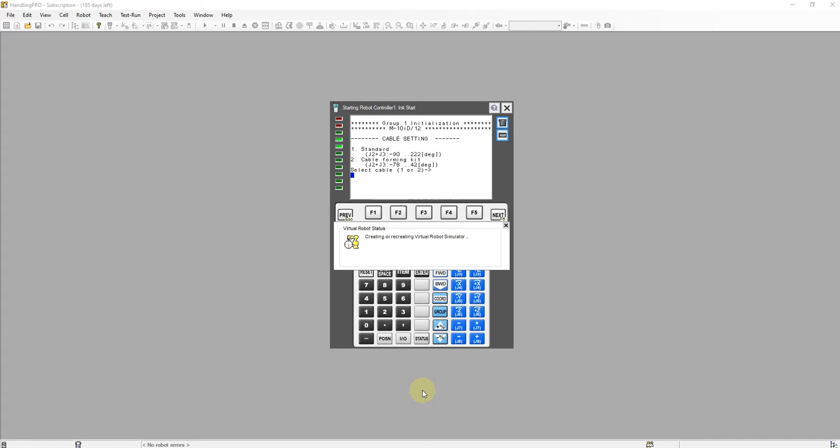Now click the next button until the finish button turns clickable and then click the finish button. Wait for Roboguide to process your selection until the robot shows.

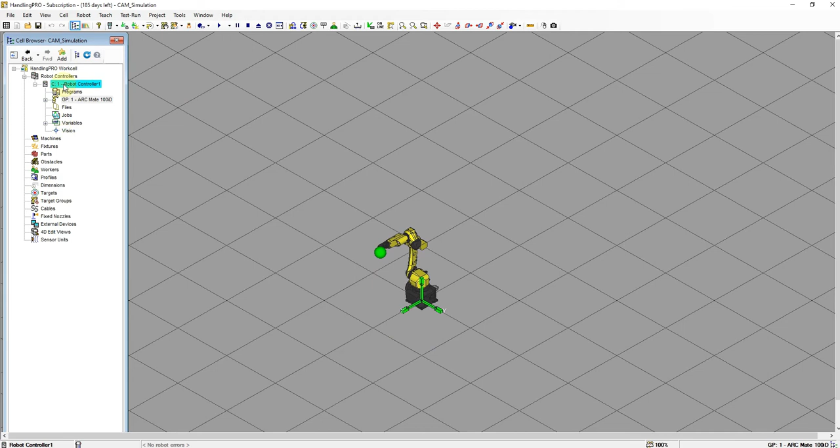For my preference, I would like to remove the grid lines of the Roboguide world to make the view clean and tidy. So if you like to do so, please follow my steps. After removing the grid, make a new floor for the robot world.

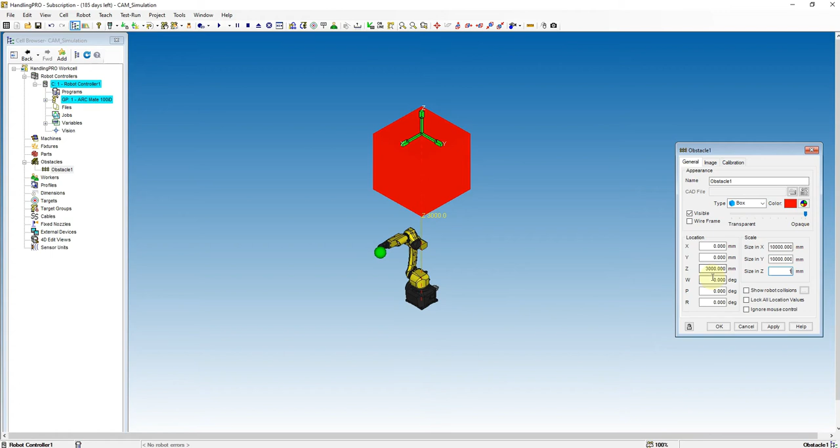Look for the obstacle title at the tree view, and then right-click on it. Select Add Obstacle and then Box at the side list. The size of the floor just needs to be larger than the robot cell. Most of the time industrial facility floors are painted in green epoxy, so I select the preset dark green as the floor color.

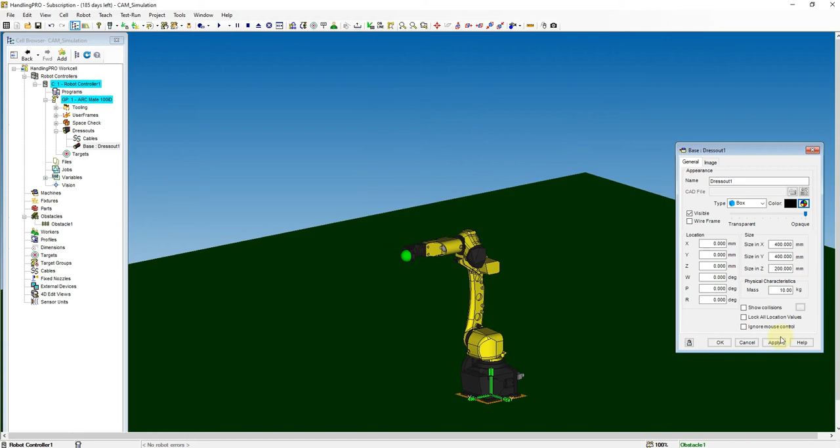Normally, the robot is not directly mounted on the floor, so we must add a base for the robot. At the tree view, expand the title name C:1 robot controller and then right-click on Add Dress Out, then select base and then box. If you don't have the design of the robot base, make the box size slightly bigger than the robot base size. To make the base look more realistic, add a link at the dress out.

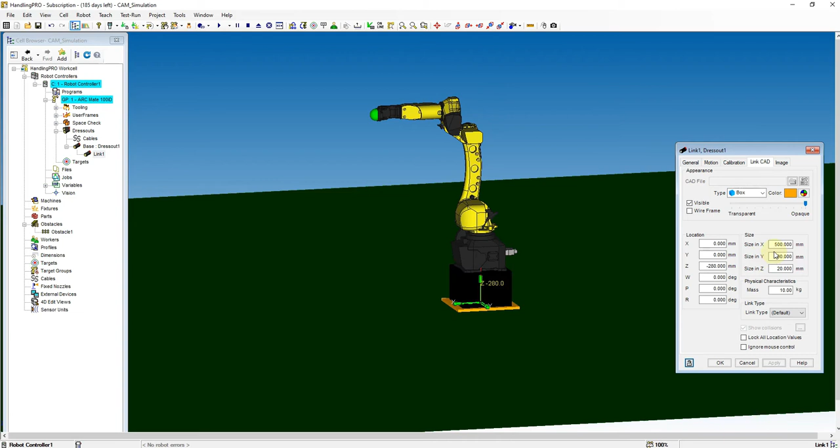Now, adjust the robot height according to the designed base height. Now, add the additional link for the base. Expand the dress out title, then right-click at the base, dress out 1, select Add Link and then select Box. Resize the link box to bigger than the base box, and about 20 mm of height is enough. Please remember to change the color of the box.

It's time to import the workpiece table. Right-click at the fixture at tree view and then select Add Fixture. If you have your own designed jig, you could import it through the single CAD file option, else you just need to select CAD library to add a Roboguide packaged fixture. I would like to select a table for this project.

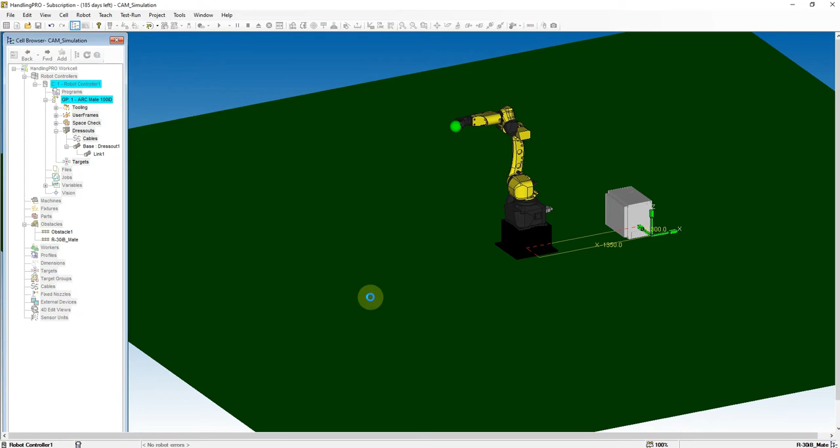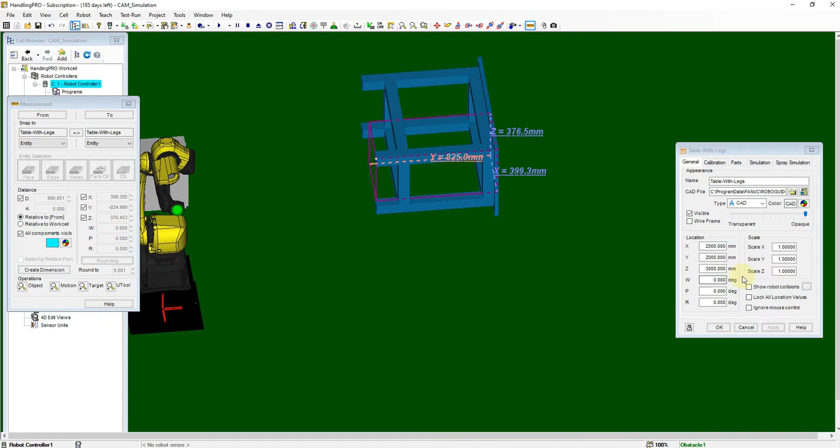This table's CAD origin is not attached to its base, so we need to measure its height to put it on the ground correctly. Go to the function bar, look for the ruler icon and left-click on it. When the measurement tool screen pops out, left-click over the tabletop surface and then left-click again at the bottom of the table leg. Now you know the height of the table.

Let's rotate the table to the correct orientation using the triad. After that, key in the height from the measurement. Adjust the table position to a reachable range of robot motion. You can drag the triad to move it or just key in the coordinates.

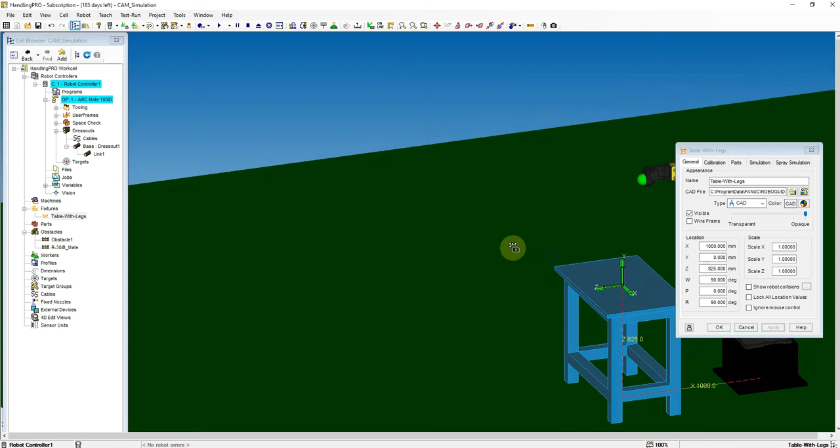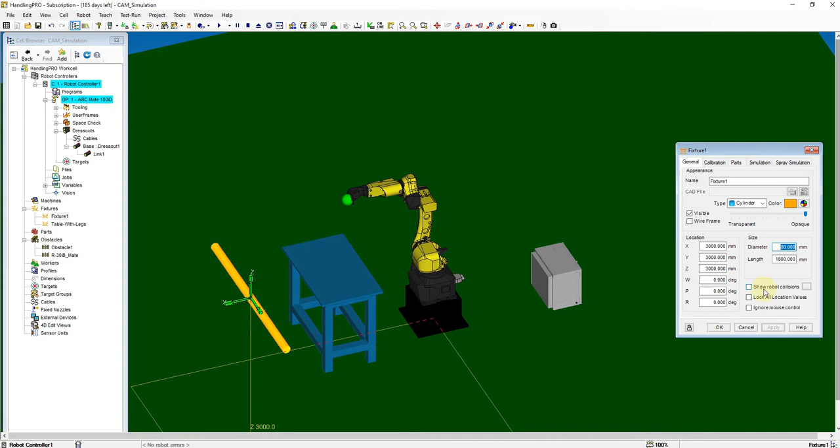Let's continue to add the camera stand. Again, add a fixture using a cylinder and set the size accordingly. Rotate the cylinder and move it using the triad nearer to the location that you require. Then apply round off to the coordinate values.

Add the horizontal bar for the camera stand using a box and set the size accordingly.

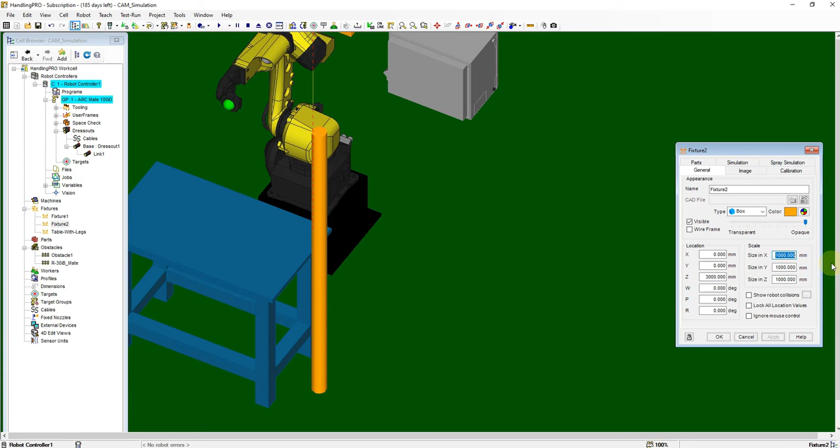Confirm the position of the fixture, then lock down the position to avoid mistakenly moving the fixture. Double-click on the 3D fixture to access the properties of the CAD and then check the box lock all location values. Repeat it for all of the CAD including the robot. Remember to save your data frequently, although autosave is enabled, to avoid an unrecoverable software crash.

After those preparations, it's time to go for Vision. Please look for the title named Vision at Tree View. Right-click on it, then select Enable Vision Simulation. Answer OK to the popped-out window. Wait for the virtual controller to restart, then your Vision is ready to connect.

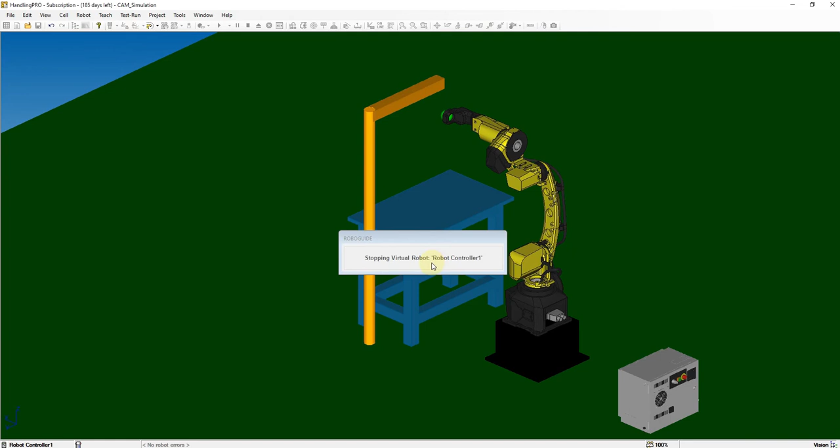Adding the camera CAD is required at this step. At Tree View, look for the Sensor Unit title and right-click, select Add Vision Sensor Unit, then Add 2D Camera, then CAD Library. The CAD library will pop out after that. Scroll down to find the camera name, Camera Package BWLED, then click OK.

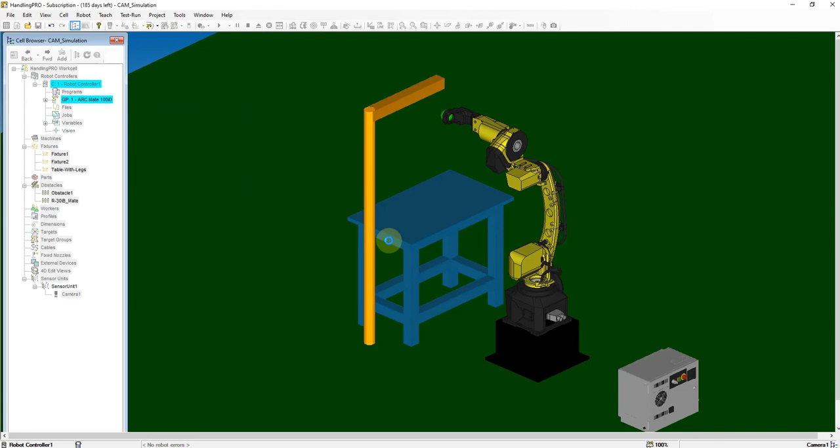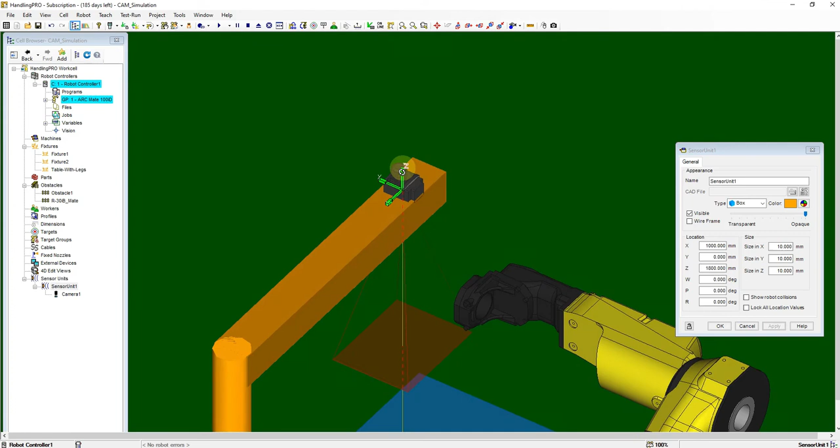When you need to move the camera, do not click the CAD directly. Select Sensor Unit 1 at Tree View, then move it with the triad or key in the coordinates. Rotate your camera according to the fixture position, and then round off the position.

Double-click on the camera body to open the camera properties and then select the View tab. Change the height of camera view zone at size setting to 900 mm. This setting does not affect the view size. It is a simulation of camera shooting action.

Go to Setting tab, select the focus length to 25 mm. This setting will change the camera viewing area. If you require a wider zone to view, you need to reduce the value of focus length. In the actual world, this represents the camera lens focal distance.

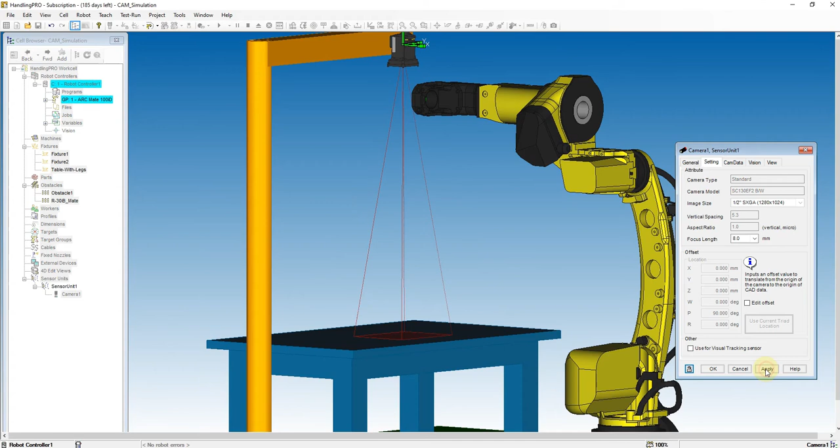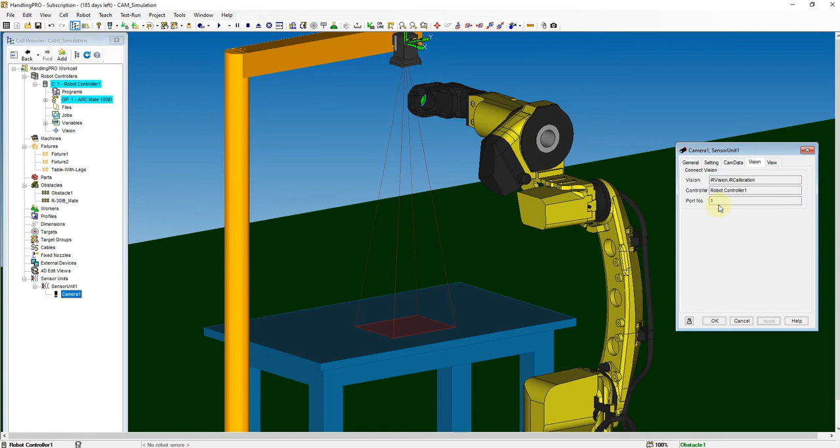It's time to check our camera connection. Go to Vision tab. If the data of connected vision is empty, you are required to go to Vision title at Tree View, then double-click on it. At the General tab, go to Device drop-down list and select the Sensor Unit 1 Camera 1. Go back to Camera Properties and then Vision tab to verify the connection. Now the connection is up.

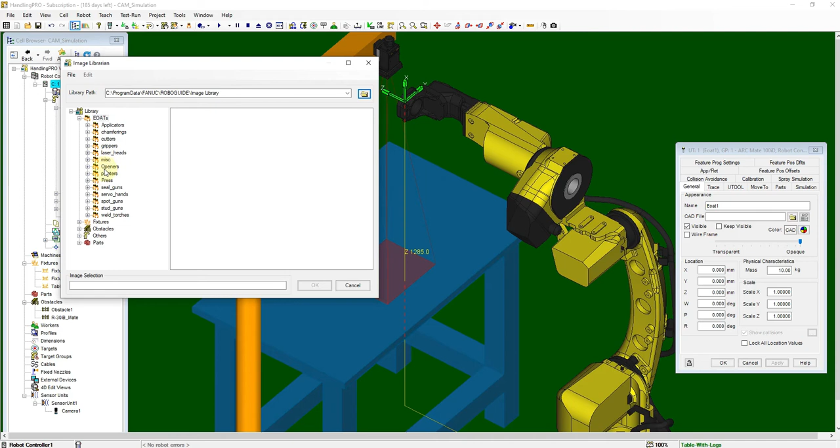Now, we need to add on the end effector for robot. Expand the Tree View title of GP1, ARC Mate 100iD, then expand again over the tooling title. Double-click the UT1 for the Properties window, then select the General tab and click the Robot Library icon. Select Pointer and click OK, then click Apply at the General tab. After that, go to U-Tool tab and check the Edit U-Tool box, then change the W value to 180.

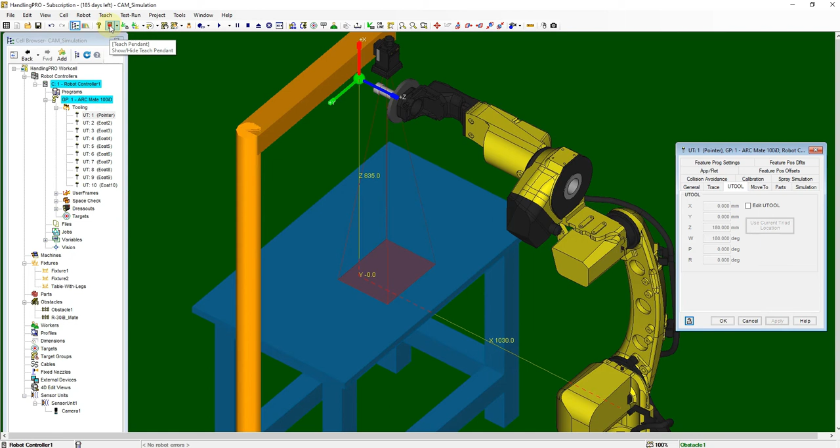Robot current position is blocking the camera view, so the robot is required to move away. Click the Teach Pendant icon at function bar, then wait for the Teach Pendant to boot up. Click the POSN button at the Teach Pendant and then modify the joint position as above. Then click Move to button.

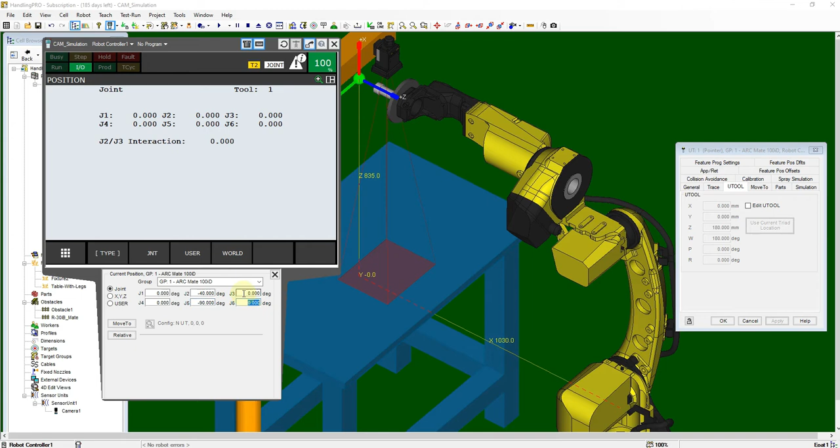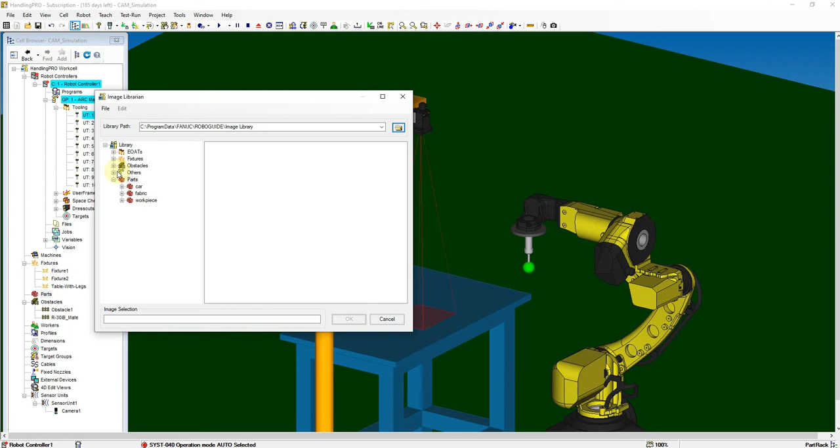Calibration of camera is now proceeding. Calibration grid is required to place on the top of the table. We can add the calibration grid from the CAD library too. Right-click at Part over Tree View, then select Add Part, then CAD Library. There are 3 sizes of calibration grids available from CAD Library. The smallest is 7.5 mm, the medium is 15 mm, and the largest is 30 mm. Please select A05B, 1405, J912, which is the largest one.

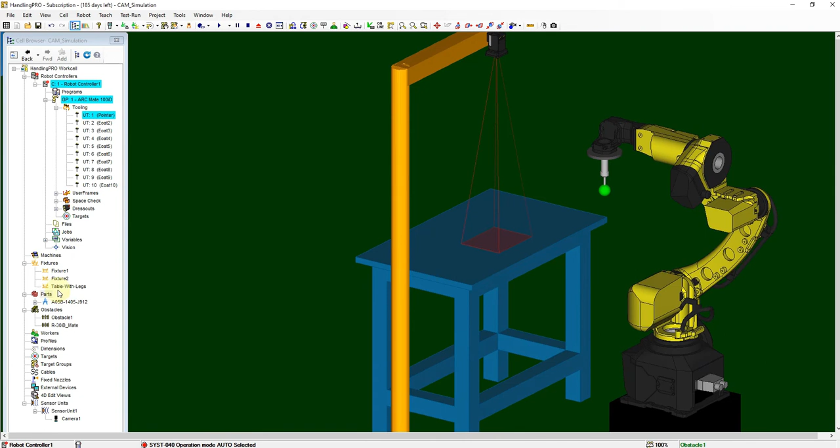Let's add the part to our table. Open the properties of the table, then go to Part tab, then check the box of the part inside the list and then click Apply button. Check the Edit Part Offset box to enable position modification. Move the triad to adjust orientation of the part and then round off the coordinates value.

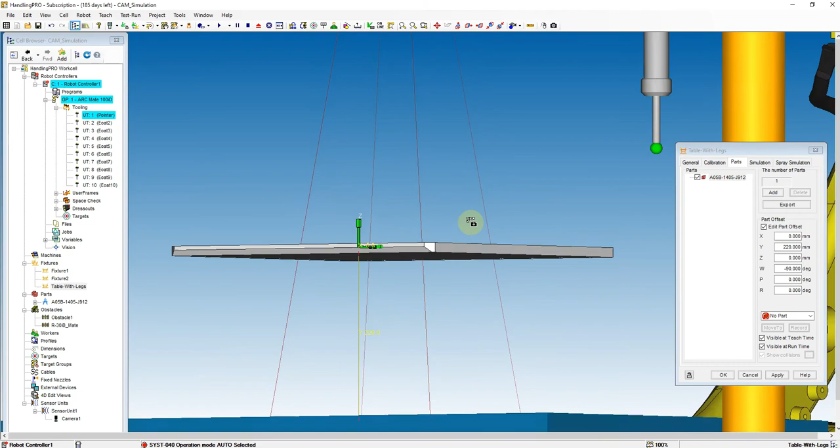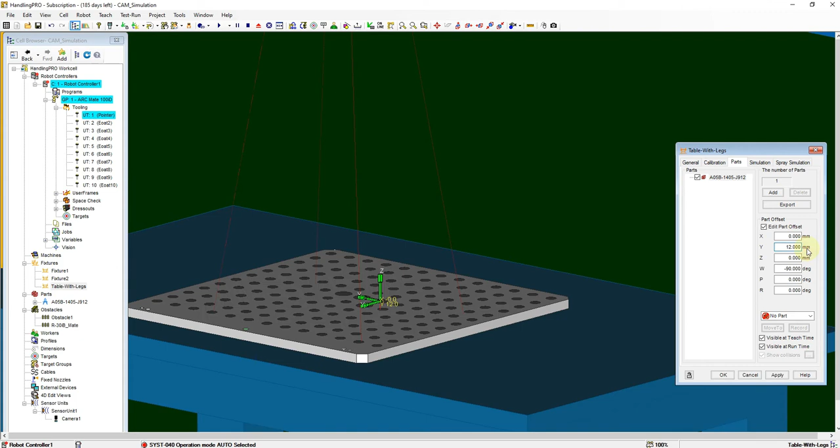Use Measurement tool again to find the thickness of the part. It is 12 mm. The position coordinate refers to the origin of the table, so overwrite the Y value to 12 mm. Check the rotation to match robot world coordinates rotation. It's not necessary to do this step but just for better understanding.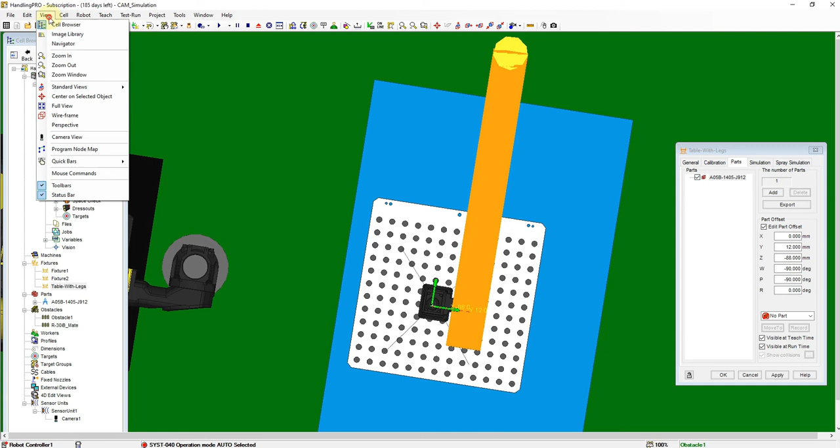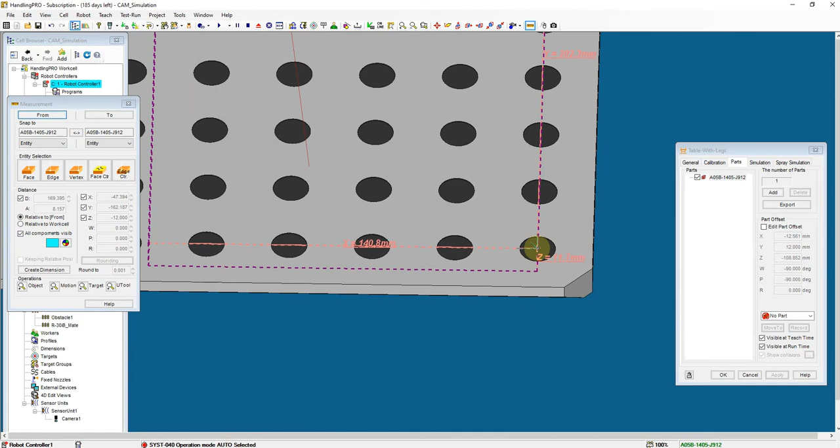Move the calibration plane center to near the view center of the camera. Go to menu bar on the top of the Roboguide, go to View tab, then select Camera View to check the view of camera. Try to fit the 3 big dots at the center of the view. With actual calibration plane, it does show the dot-to-dot distance on the calibration plane but not available in Roboguide, so measure it to reconfirm again.

To let the robot calculate the position of camera during calibration, position of calibration plane is required to set up the user frame. Unfortunately, in Roboguide it is difficult to touch up the user frame, but there is another way to attach user frame directly on the calibration plane. At the tree view, open the user frame and select user frame 1. From the pop-out window, go to Attached Setting, drop down the list and then select the part added previously under the Table-With-Legs. After that, check the Edit U-Frame box to enable editing the position, then set the user frame data to all 0.

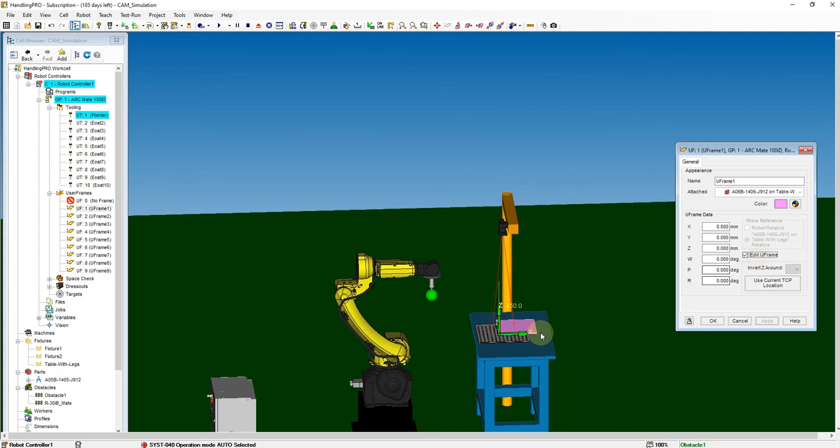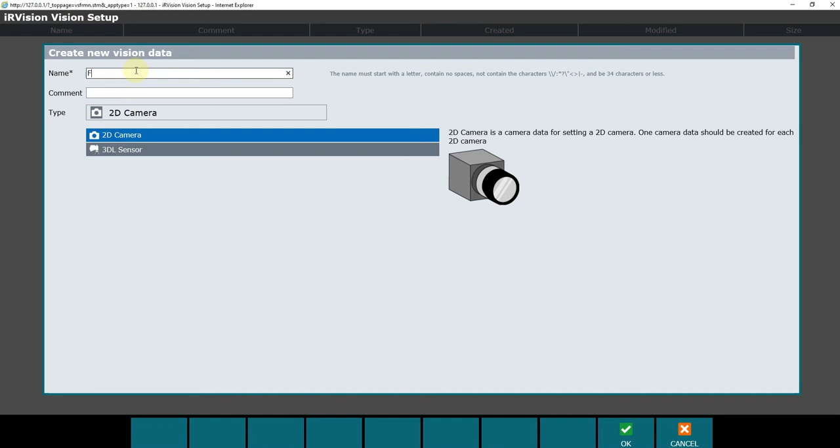Move on to the vision calibration, go to menu bar and select Robot and then select Internet Explorer from the list. Now, select iRVision, Vision Setup. Select the Create button at the bottom to create camera data setup. Key in the camera name to create the camera data. After completing the camera data, double-click at the data. Select the connected camera, then set the robot-mounted camera to No. Ignore the exposure setting and LED setting, because Roboguide World does not simulate lighting.

Select Grid Calibration at Calibration. Click at Calibration Procedure icon. Ignore Robot to be offset because only one robot is used. Ignore Application Frame to set because the calibration plane does not flip too much from the robot orientation origin. Grid spacing set to 30 mm. Ignore number of planes because fixed camera and robot does not handle the calibration plane. Select No at Robot held Calibration Grid and then set Calibration Grid Frame at User Frame 1.

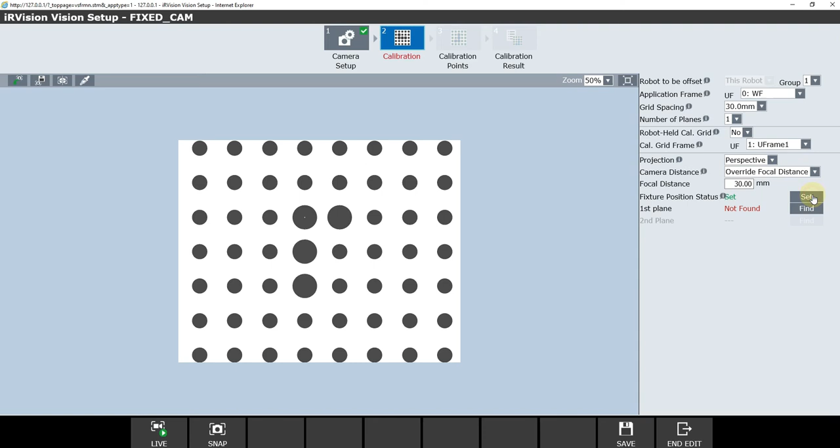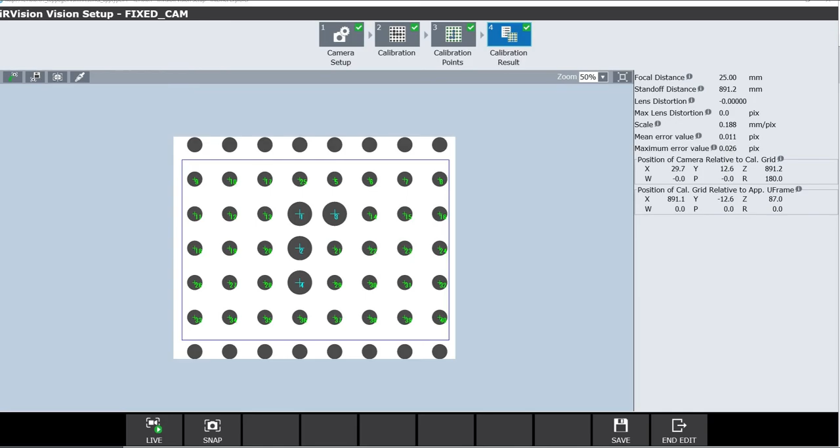For the projection, remain perspective. Camera distance set to override focal distance. Then set the focal distance to 25 mm. If your calibration plane is in position, then proceed to click Set at Fixture Position Status. Click the first plane button, then bracket the full circle dots as much as possible. Please remember to save your calibration data after completing calibration. Check the vision setup data. Is the standoff distance of camera to calibration plane in range?

We are ready to create the vision process program. Here we go. Click the Create button on the bottom of the screen, and then select the 2D Single View Vision Process under Vision Process tool. Then key in the name for Vision Process and click OK.

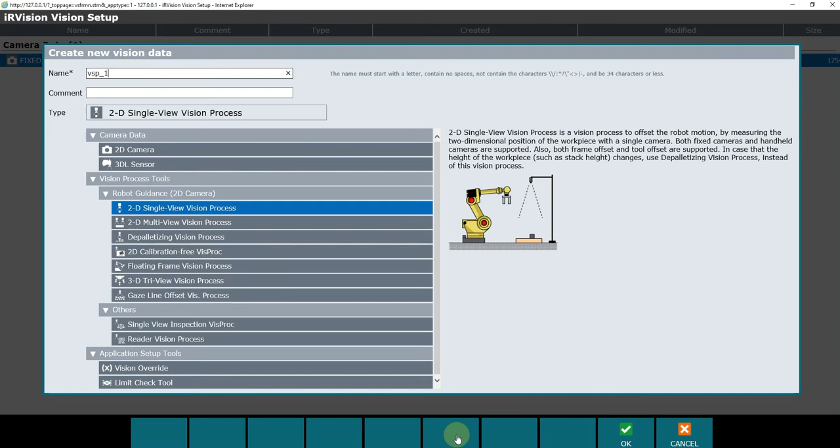Back to the Vision Setup screen, double-click on the Vision Process tool that you have created to enter the edit mode. Now, select the 2D Single View Process at the top right of the screen. Then back to the setting list below. Set the camera with the calibration camera name. Set the number to find to 1.

Set the offset mode to fixed frame offset. Set the offset frame same as your calibration user frame. Leave the sort key, sort order, delete duplicates, and measurement in default settings. Image logging mode set to do not log. Display image remains default. Ignore the settings below, then we move on to the Snap Tool 1.

For this tool, all settings remaining default is okay, but actual world adjustments may be needed to improve the image quality. Now, we move on to the GPM Locator Tool 1. This tool records the reference image and also applies condition judgment on future captured images.

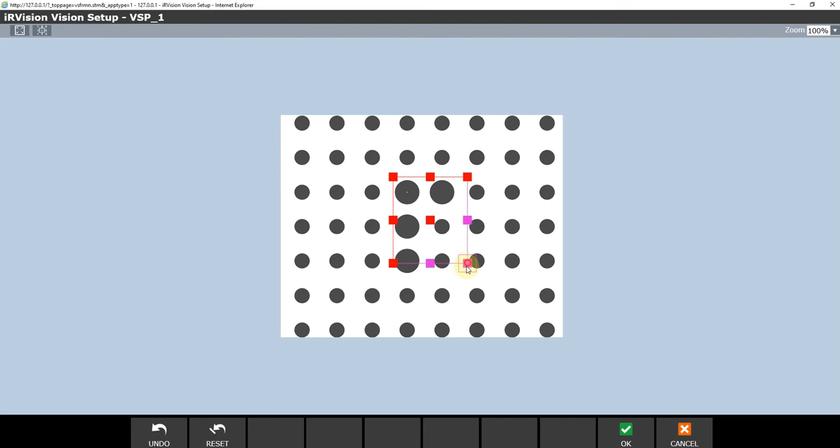Go to the setting list below, click on the Teach button and the teaching bracket screen will appear. Now bracket the image you want to reference, then click OK at the bottom. Ignore the G-edit, this image does not require editing the graphic. Move on to the Set Origin button and click it. Move the cross mark to the position as the reference origin of your image, and then click OK at the bottom.

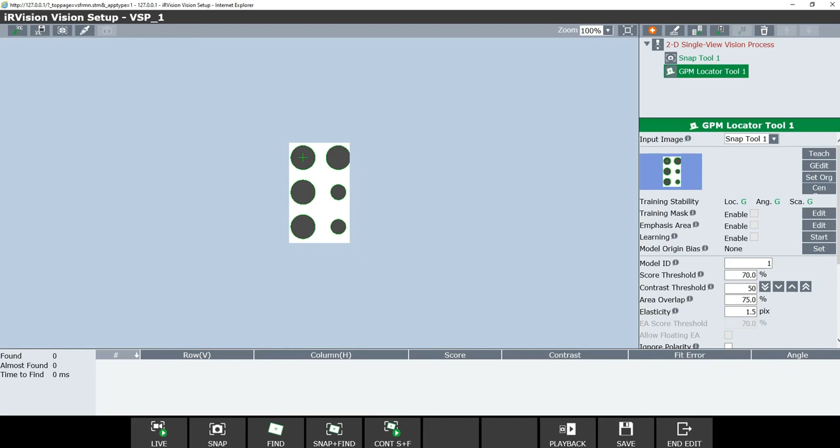If you notice that there are some unwanted images captured together that cannot be excluded from the bracketing tool, you just need to mask them. From the image, the two small circles are not the main item for vision to find, so we apply a mask with the training mask column and click Edit. Now mask those two small circles and then click OK at the bottom.

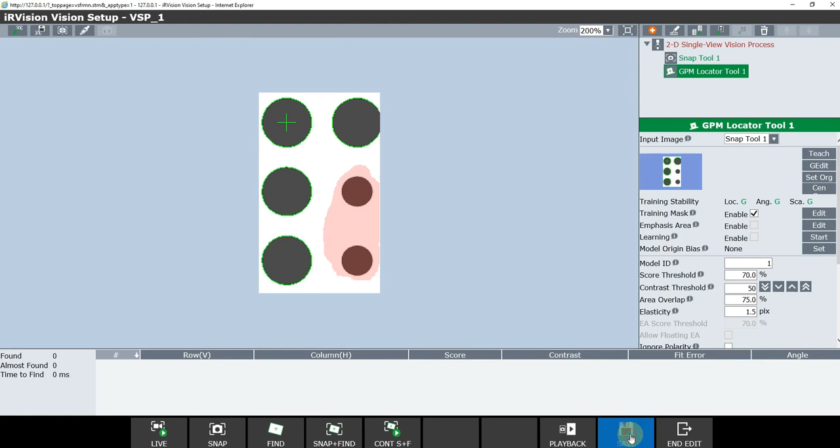Don't forget to save your vision process tool setup after you are done masking. Then click the Snap plus Find button at the bottom of the screen. The vision process tool seems to have found two matching items in the image, therefore we have to adjust the score threshold to reduce mistakes in judgment. After the adjustment of the score threshold, the result becomes stable. Now, we can proceed to the next step.

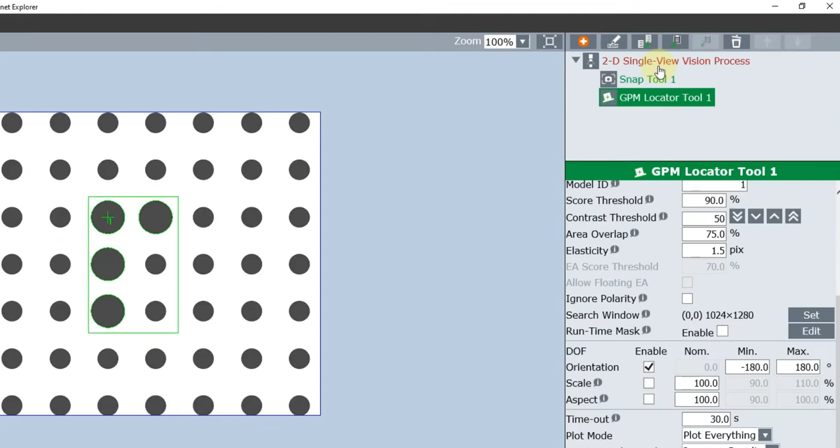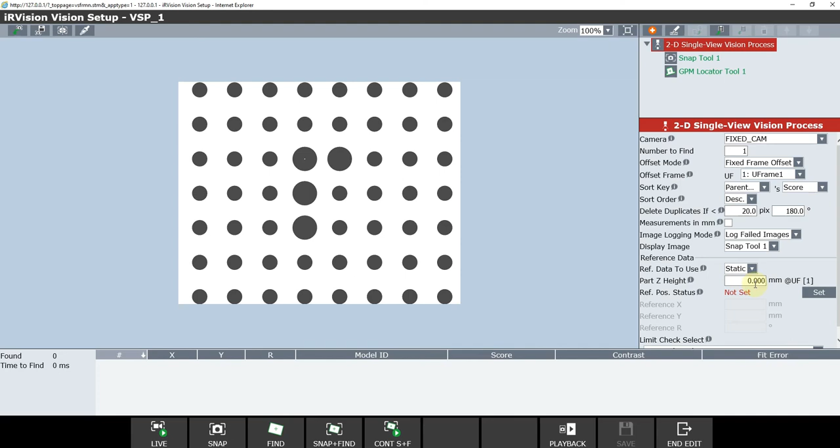Move back to the parent setting page of the 2D single view vision process. Then scroll the setting list to the bottom and find reference data. Reference data to use remains unchanged, as there is no other image to find in the same vision process. Part Z height does not need to be set in case the robot is touching the calibration plane. If the actual workpieces are higher than the calibration plane surface, measure the height and input it into this box. Now click the Snap plus Find button at the bottom.

Once the image shows found success with a green bracket, click the Set button at reference position status. Don't forget to save again after completing the setting. Following with the End Edit button on the right, you can close Internet Explorer now as the vision process tool is ready to run. Now, turn on the Teach pendant in Roboguide. We are ready to create a motion program.

Click the Select button on the Teach pendant, and then click the Create button on the Teach pendant screen. On the pop-out list, click the Options or Keyboard selection, then name your program with the ASCII input keyboard. After keying in the program name, press Enter twice to complete the creation. Please input the program according to the video. Enjoy some music while doing this.

Declaring the tool frame and user frame at the beginning of the program is really important to avoid mistaken operation from manually choosing a different tool number. Before touching up a position in the program, please hold Shift and click the Coordinates button to check the current active user tool number and user frame number. Click the Previous button to exit the yellow pop-out screen.

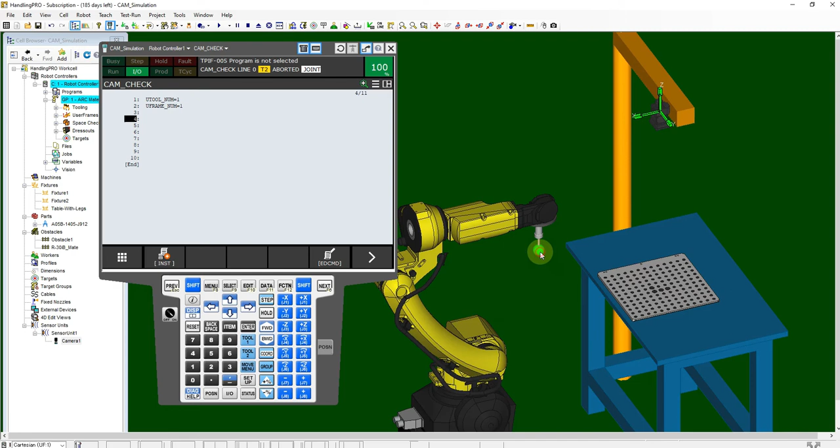You can move the robot tool center point to the plane center directly through Set All 0 at the current position, referring to the current active user frame.

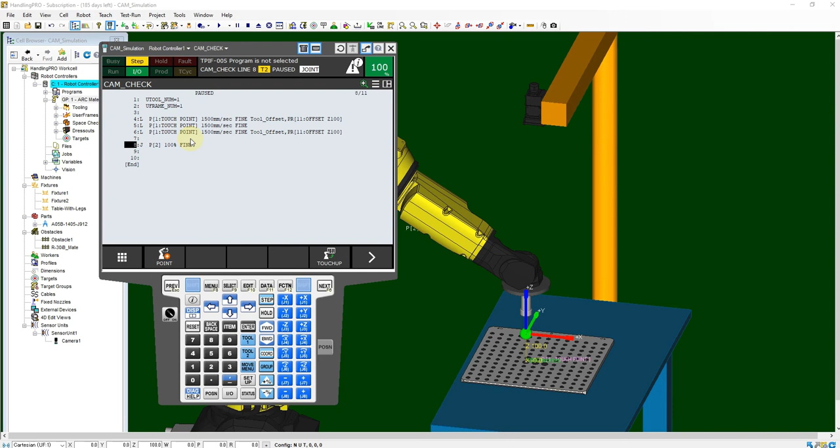Now, add the vision instruction to call for snap, then wait for a tiny time, then get data from the vision system.

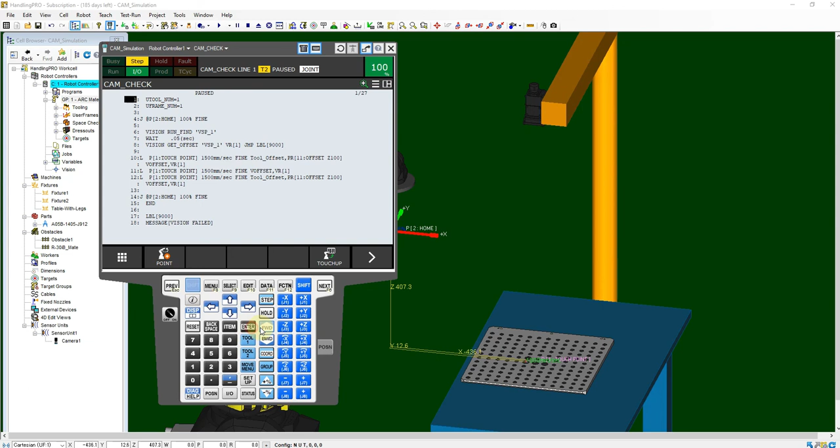Find the Step button and click it, then hold Shift and click the Forward button to run the program line by line, until the robot moves to the position.

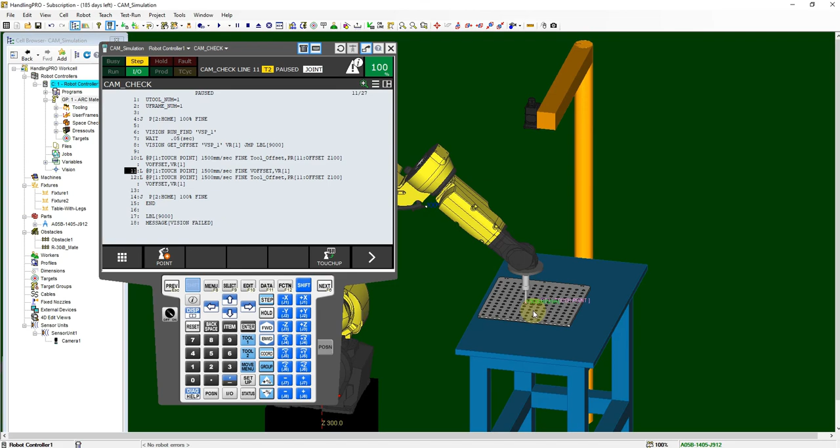Have a try at changing the position of the workpiece through the Table Properties Part tab. Slightly offset the data and then run the program with the Teach Pendant.

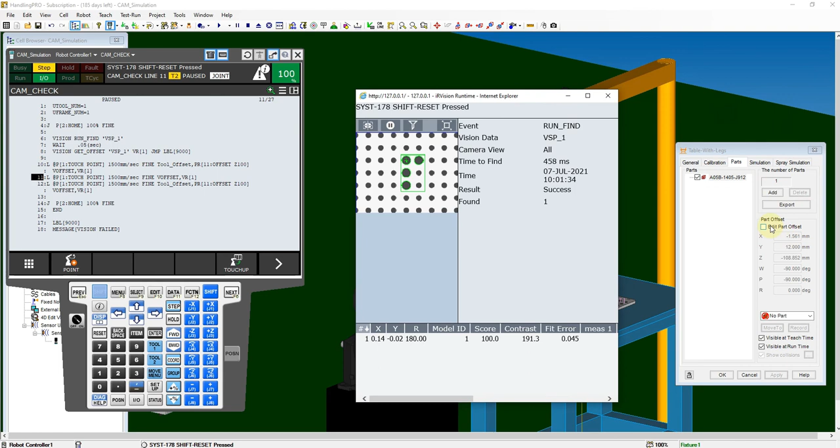Have a try at changing the position of the workpiece through the Table Properties Part tab. Slightly offset the data and then run the program with the Teach Pendant.